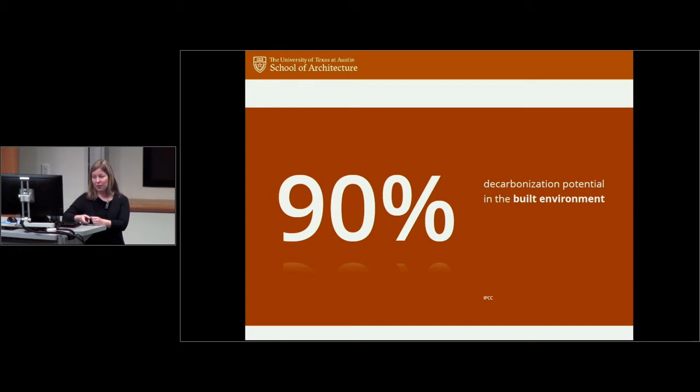The motivation for this research is mainly because 34% of U.S. greenhouse gas emissions are due to the built environment. So we have a lot of impact on the environment, and the IPCC has noted that the decarbonization potential in the built environment could be up to 90%. So this 34%, when you combine it also with the other, let's say 30% is transportation and roughly another 33% is industry. If you look at transportation and buildings combined, that's basically our cities. So how we design and build our cities is over half of the CO2 emissions. And so we have a lot of leverage as designers, urban planners, architects, engineers to address this issue.

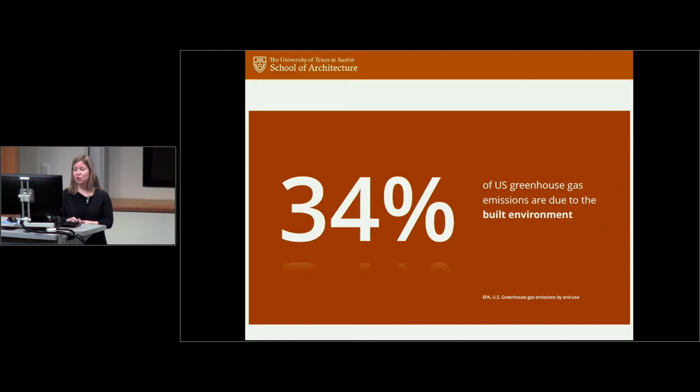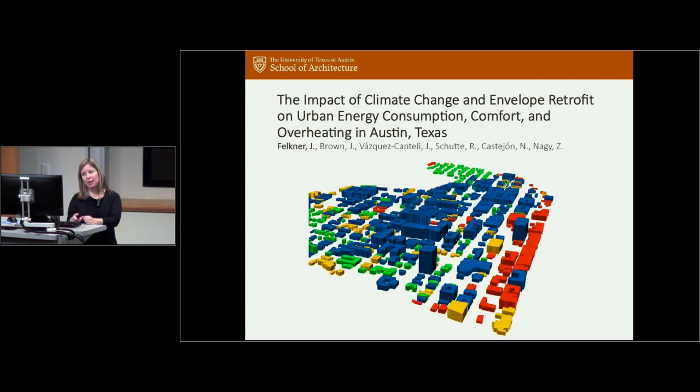So the first project I'd like to talk to you about is the impact of climate change and envelope retrofit on urban energy consumption, comfort, and overheating in Austin. So what we did is first we took a specific neighborhood in Austin. We wanted to look at West Campus because West Campus is already undergoing so much change, so it's a good test case for what could happen in Austin to come. And we wanted to look at 4 different housing types.

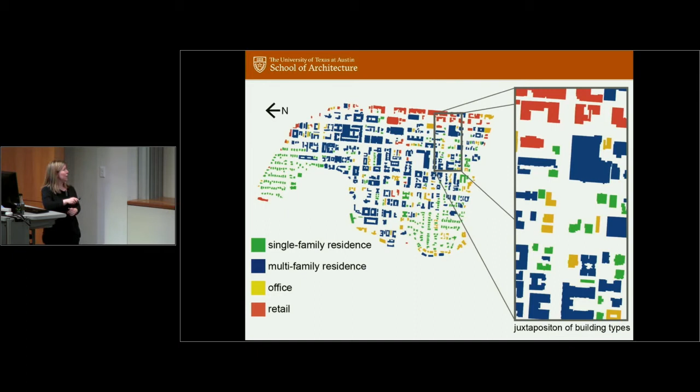In green, you see single family residences. In blue, you can see the multifamily. Yellow is office and red is retail. So this area is already becoming mixed use, where you will see a juxtaposition of different building types from single family homes to retail and larger multifamily homes. And then on the outskirts of this area, you see still very many original single-family homes, and of course offices and retail among the major streets.

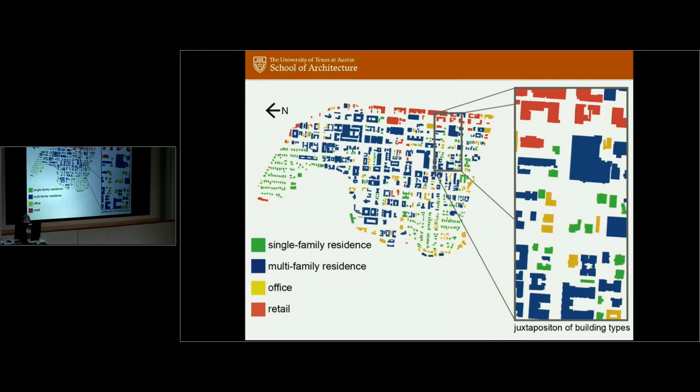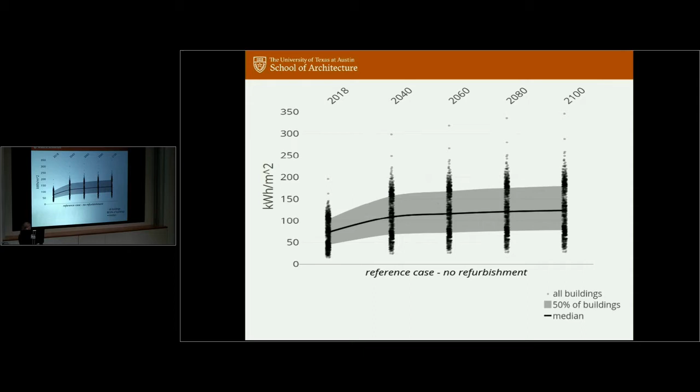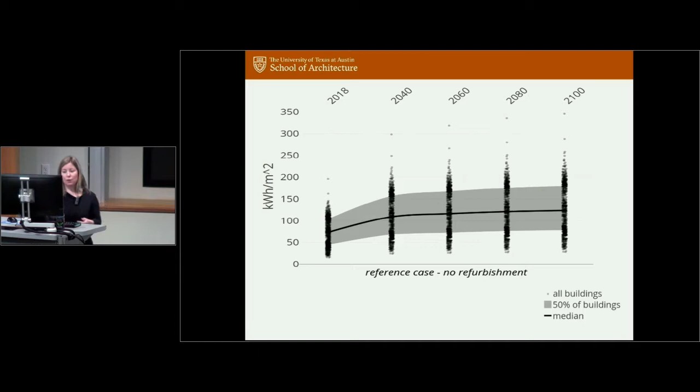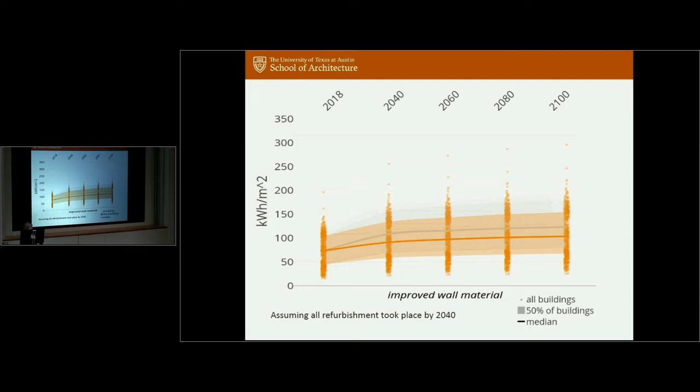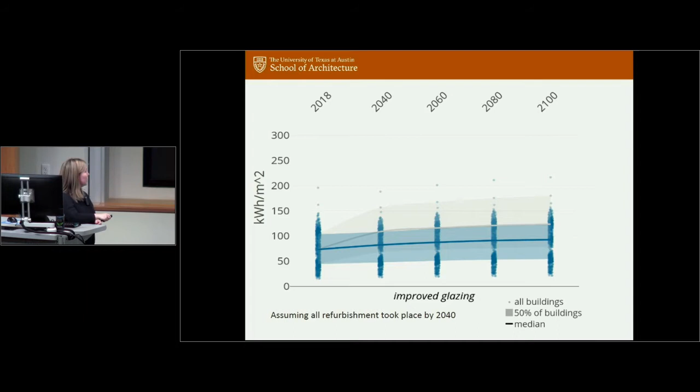If you improve the glazing or the windows of your building, you see even more of a dramatic improvement. So we think this is because we are a cooling dominant climate where we rely upon a lot of air conditioning and we have a lot of sun. So refurbishing those windows is going to improve the performance a great deal for your energy.

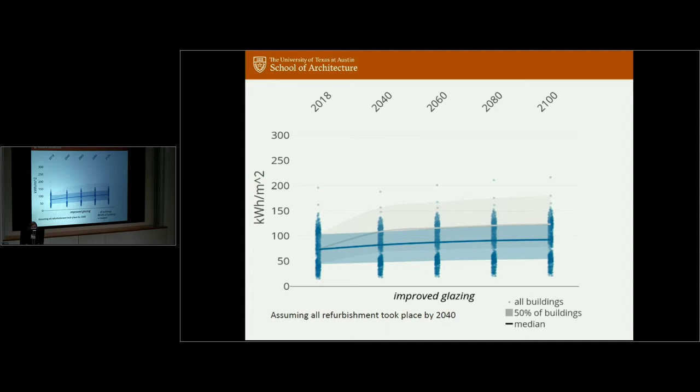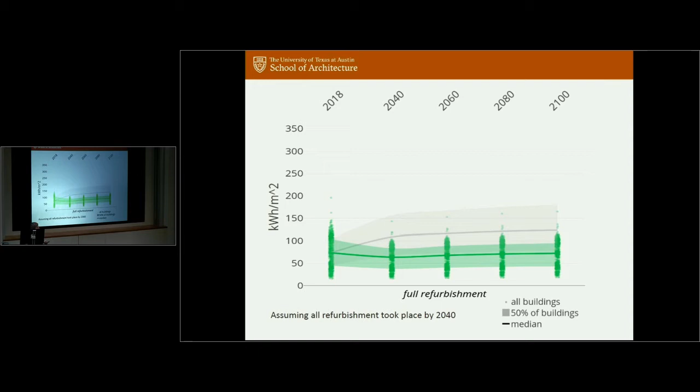And best of all, we found if you changed both the walls and the windows in all of the buildings, you could see the energy consumed by all buildings would be much lower than the median, even what we have today, even in the face of increased temperatures. So we could have a huge impact on our carbon emissions just by refurbishing our buildings, both windows and walls.

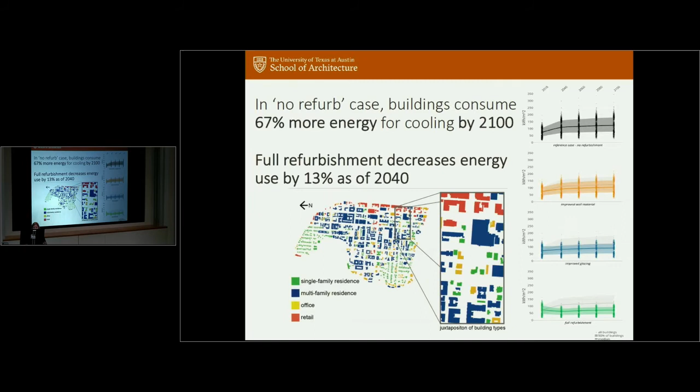You can see now that different building types are going to respond differently to an overheating condition. And that was somewhat surprising to us. We thought that they'd somewhat be affected in a similar way, but you can see the retail is having the worst case. In the no refurbishment case, if we don't refurbish our buildings, they'll start to consume 67% more energy just for cooling by 2100. So that's not something necessarily we would want. We're trying to reduce our carbon footprint, not increase it.

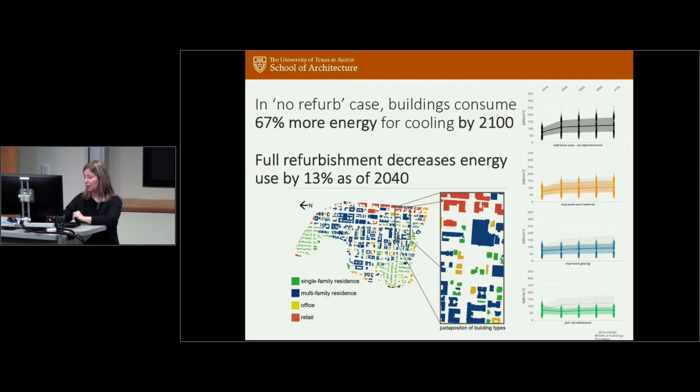Full refurbishment of windows and walls will decrease our energy use by 13% by 2040. So that's a step in the right direction in terms of energy savings. However, it is important to be aware of the risks. Refurbished building envelopes will create more disastrous overheating conditions, even with natural ventilation. So we even looked at what if you have naturally ventilated buildings? Will that help some of this phenomenon? But it didn't. We were still seeing mean indoor temperatures above 41 degrees Celsius by 2100 if you had a blackout. And it's also interesting that different building types will experience this in different ways.

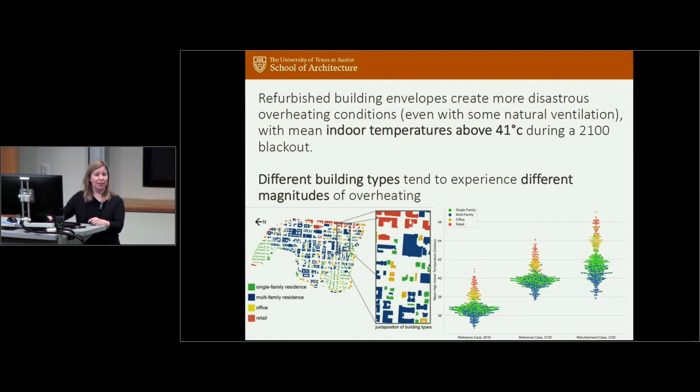So there's a lot more research to be done in this area, and our group is starting to look at this issue along with other groups on campus, mainly for Austin, because that's where we are and that's what we care about. We're using Austin as a test case, which of course can be relevant for the rest of the country as well. So building upon this first study, we were thinking about Austin. We're growing so rapidly. How do we deal with all of the new people coming in and the increased population in general? You can see in the last 100 years, Austin's skyline has changed dramatically. Even in the last 10 years, it's changed quite a bit. Our traffic has gotten a lot worse.

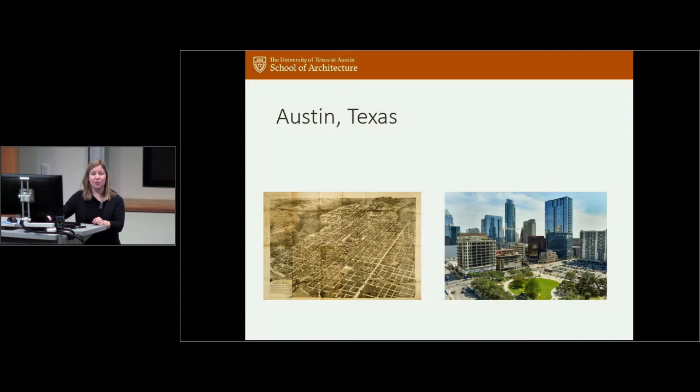So planners are starting to really worry, what are we going to do? And so we started to look at this in terms of also climate change. How will we deal on the larger city scale with this issue? So this project, Urban Densification and Housing Typology for Climate Change Mitigation, is looking at the larger scale effects of how we're going to address climate change and where we should densify and what timeline should we densify.

It's a very tricky subject. There's a lot of not in my backyard, which is totally understandable. On the other hand, we don't want to have more sprawl either and more traffic, or nobody really wants to have a high carbon footprint from driving so far to work each day. But some people just don't have an alternative. They simply cannot afford to live close in.

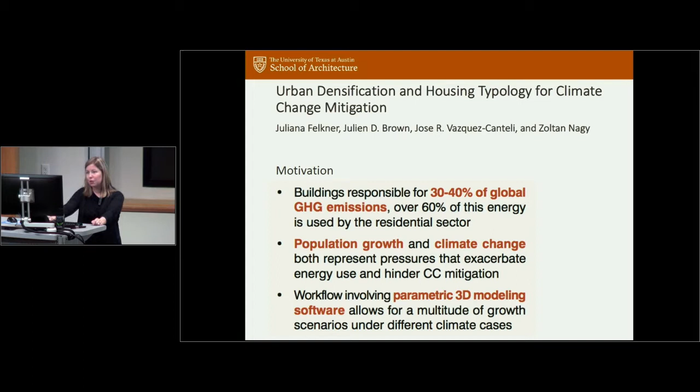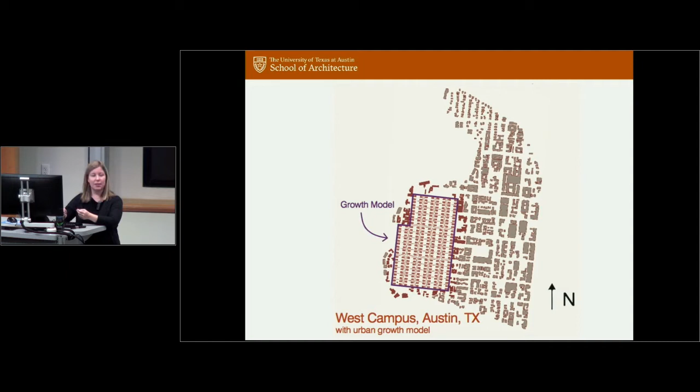So we're looking at different densification scenarios. And again, we took West Campus. We wanted to do a growth model and look at what if each of these plots could be parametrically modeled to see the impact of its growth over time. And so for a single parcel of land, you can imagine right now in many parts of West Campus, what you see is this scenario where you have about 4 single family homes on a single parcel.

And other parts of West Campus, you start to see more of this situation where you've got about 3-story low-rise buildings. Often this is student housing, but not always. There can be other people living in these as well. And slowly you're starting to even see a few of these mid-rise buildings, which are about 8 stories and higher. And here we classify the tower as being anything over 24 stories. And again, we project far into the future, up to the year 2100, to imagine how will Austin look by then.

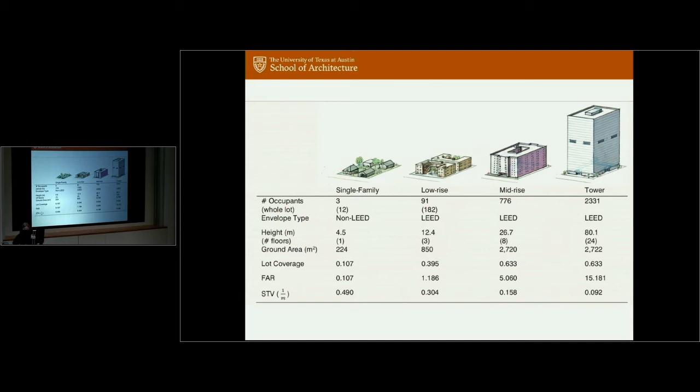And this is how we modeled it. So if you look first at the colors, we represent single family with the gray, the low rise with the orange, mid rise with the pink, and the tower with the purple. And we ran many different scenarios to try to get an idea of what it might be like if Austin grows one way or another. And we thought about the population growth predicted by the city as a whole, and we scaled that down to just think of West Campus if it grows in that same way. So in order for West Campus to continue to contain that much growth within its borders, this is what we found.

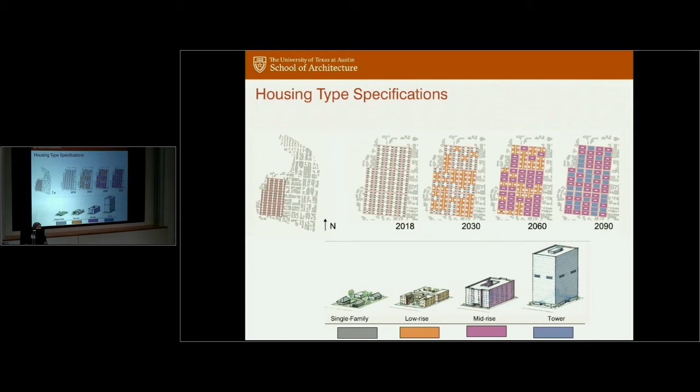In order to occupy that amount of land and deal with the increased density, by 2090, if you mix mid-rise and tower, almost all of those gray single-family homes would be squeezed out. So we're trying to model different ways to see how could we have more green space, how could we not have every single-family home phased out, but also how do we deal with the increasing population.

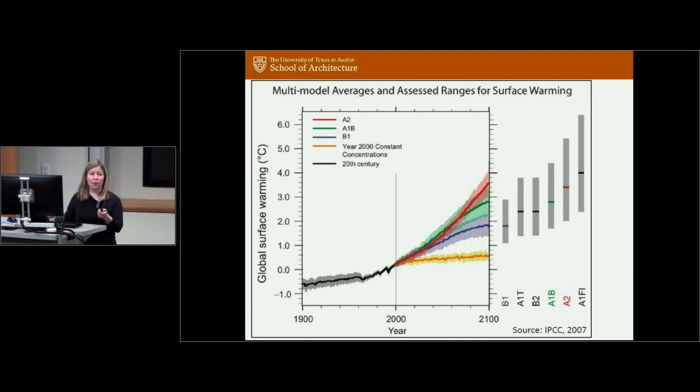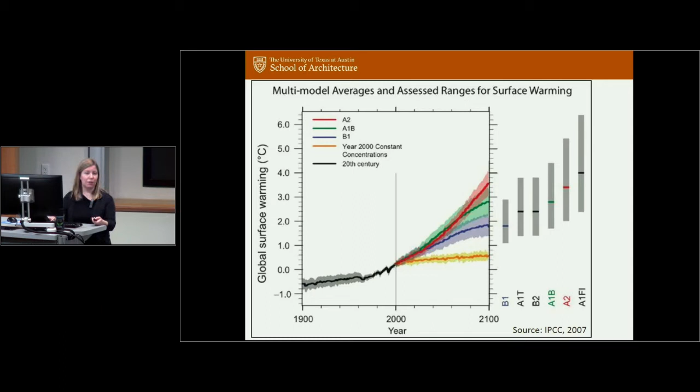We also considered the temperatures. So this is by the IPCC. We used a moderate projection. The estimate we used was the A1B scenario, where they're expecting temperature increases of between 2 and 3 degrees Celsius. This is a moderate one. We might change it out later on to think of the more extreme case, but this is a moderate case that supposes kind of a mix of fuel types by 2100. So not completely phasing out fossil fuels, but having a mix. Of course, we don't know what will happen by then, but that's our assumption.

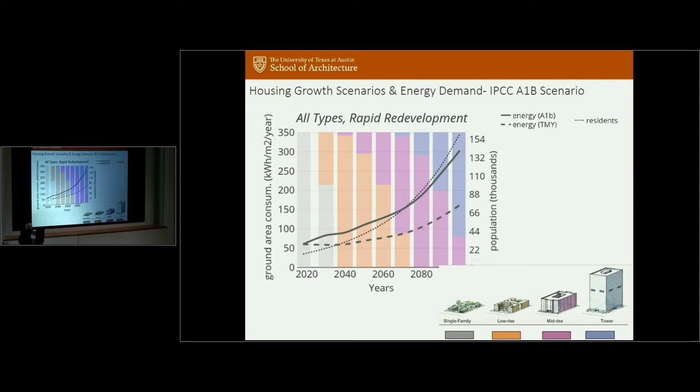So population will increase. What you see here is that the gray represents single-family houses. Imagine we had mostly these. And slowly, with the orange, you start to see more low-rise houses taking up those parcels. If we lock ourselves into low-rise houses on those lots, pretty soon, by 2040, there won't be any more land left. So West Campus could not grow anymore after that point if you decided to only build with this housing type. If you decided to just stay with single family, there's not enough room in West Campus to go beyond 2030 with our current growth.

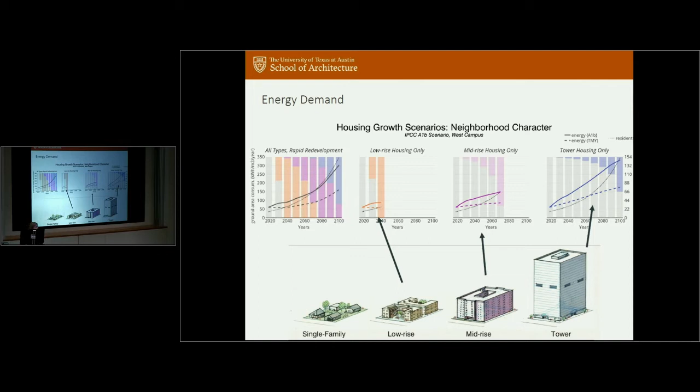If you look at only mid-rise, you see single-family homes can continue to make up a portion of those plots, and even up till 2070, if you have mid-rise mixed with some single family, that would still work. If you only do towers on those lots, one tower is replacing a whole lot, so 4 single-family homes. Yeah, it would be a pity that those 4 homes are lost, but if you think of it in terms of all of the homes that would not be lost, if you do take up one block with the tower, you can see almost half of your parcels could still be single-family homes with green space.

So this will have an impact on how we grow, both on outdoor climate, such as urban heat island effect, ventilation, shading. There are a lot of different impacts that we haven't modeled yet that will be important to consider as we grow. What we did consider is the energy increase based on these increasing temperatures. And you can see all scenarios do see an increase of energy use in time.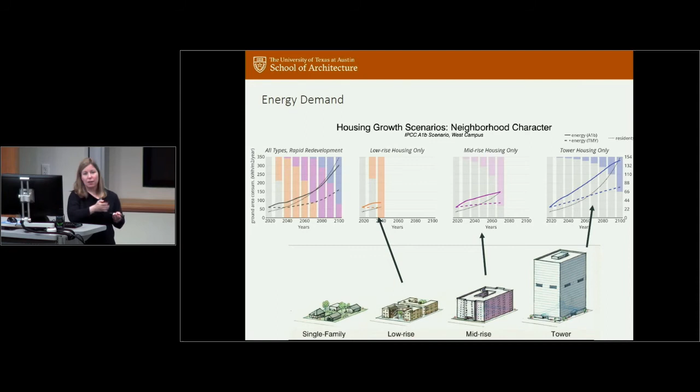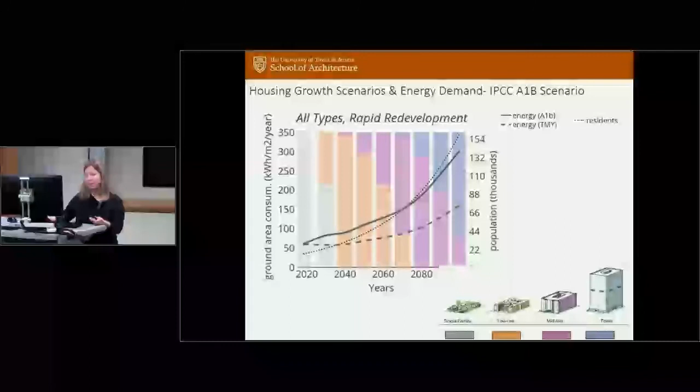However, compared to mixed development where we would allow all types of development, so all types is what we imagine could happen, that slowly they start to mix all types, a little bit of low rise, a little bit of mid rise, a little bit of high rise, something kind of like a mixed checkerboard. That type would not help as much with the energy savings as if you did the 2 what we would consider densest options, which are either mid-rise or tower.

When we modeled the energy use of mid-rise only or tower only, we can see annual energy use difference. You can save quite a bit of energy from tower housing only. Also, some from mid-rise, so this is almost 5% savings. This is about 12% savings by 2040, 2060. It would definitely help because, again, we think they're insulating each other.

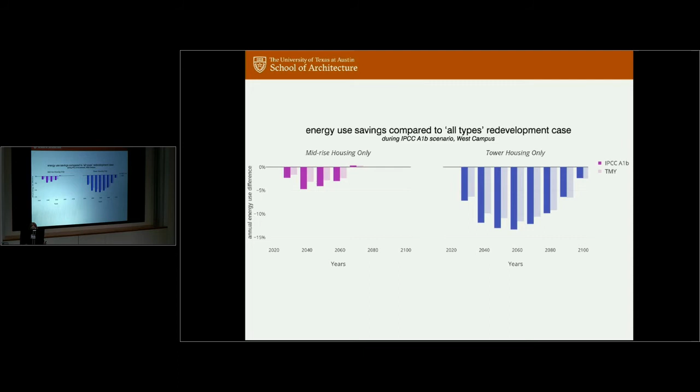So here we see the energy use impact of climate change on different urban densification strategies. You can see by 2040 there won't be a lot of room for these 3-story buildings. They would most likely be torn down and rebuilt, which is also a consideration when you think about the embodied energy that goes into the construction of these buildings. So cooling load will increase regardless of housing type.

So in all cases, multifamily housing would greatly reduce the cooling load per capita compared to single-family housing, which is what we expected. Of course, the adverse effects of climate change, weather, will increase over time as warming intensifies, no matter how we build. But it's important to note that half of the increased energy use will be due to population growth, but the other half is going to be just because of increased temperatures.

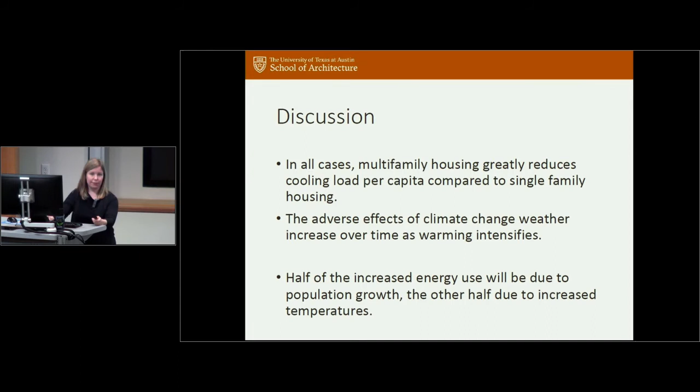So now I'll talk about something a little more optimistic. This is some of my student work. So in class, I teach both construction, which is kind of their applied structures class, and environmental controls, which is where they consider the energy use in their buildings. And I give them a combined project for both classes where they can think about how to absorb the increasing population in Austin without losing our heritage buildings.

So a lot of the students I teach are from Texas, some are from Austin, and I ask them what is their impression of some of the historic buildings downtown, even though they may be only 1 or 2 stories and developers tend to think nothing of tearing them down. And I was really surprised about the connection that some of the people have with these buildings. They get very emotional about them and they know them and they've grown up around them. So it is part of the heritage.

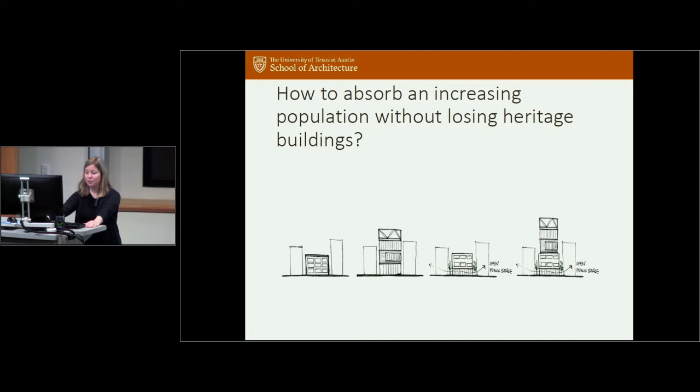And so it's an interesting and kind of a personal goal of theirs as architects to think how to preserve that. So we look at all kinds of examples of vertical extensions for historic structures. Part of this is to give them a lesson in structures, but the bigger lesson is how do they think about densifying historic areas, which Austin has. And you can see many examples from extreme towers added to historic buildings or just subtle additions made to buildings. And I take them through quite a few different precedents throughout the world that they can look at and be inspired by.

And one of the characteristics of adding on to historic buildings is that normally the addition is meant to be contrasting so that there's no kind of false advertising that this was always this way. So the historic preservationists like there typically to be a contrast. If you are going to add something on to it, that it's not confused to be part of the original, because the original should still be legible. So you can see in this single-family house here, this row house, they've added just a single story. That's a moderate addition, but then you can see in other places they've added almost twice the square footage.

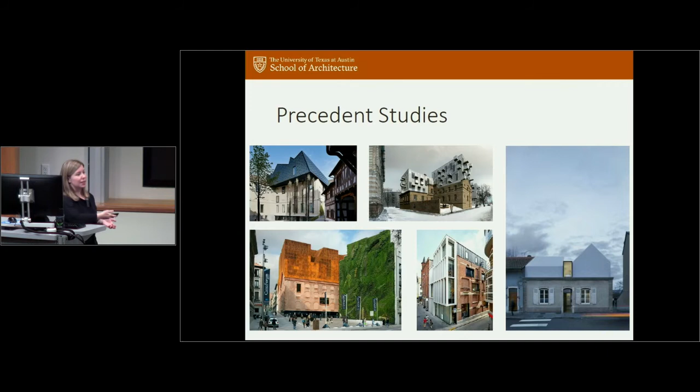Here's another example I like to show the students. These are actual built projects where you can see they've even preserved the state of decay, because that's part of their history, and just built within it without disrupting it.

And another thing that I try to stress with them is to think about this condition walking along the building, looking up at it. So some of these precedents, like this one, this is in New York. This is where you're walking on the street. Let's say you look up at, this was a project by Foster. If you look up at this, you won't even really see the tower, because you'll be so close along the facade, you'll really only see the historic building.

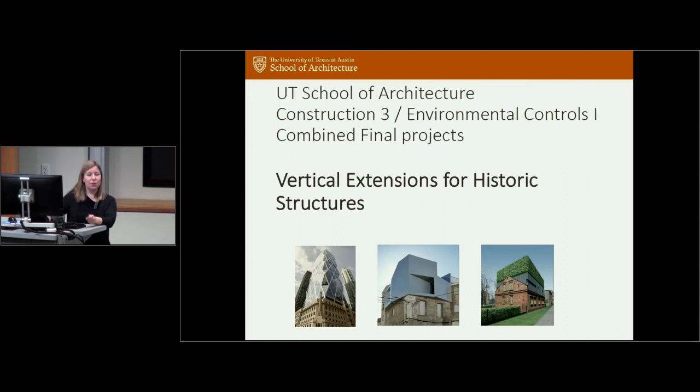It's only if you get far away, like the camera person in this case did, that you'll actually even notice the tower. And so in some places, even Seoul, Korea, I've heard that this is common to do, and they'll simply have a setback so that your eye level won't even see the addition. So sometimes it can be subtle, even though it's adding a lot of square footage.

So this is one building in Austin that some students wanted to add an addition to, and the reason is they liked the history of it. It was designed in 1938, and they liked that it had already been added to. It had 8 stories to begin with, and it had a 9th story added in 1949, and then they added a 10th story in 1952. And now it's listed on the National Register of Historic Places.

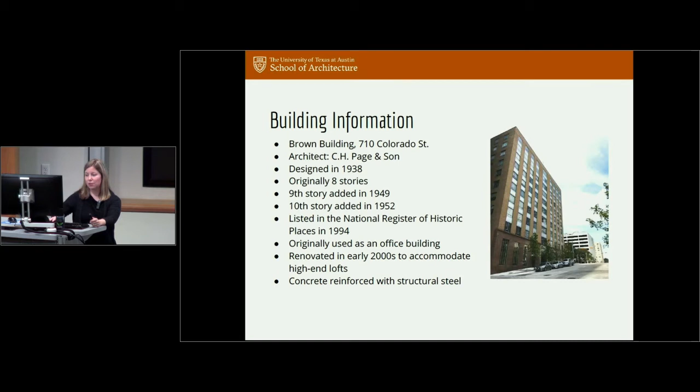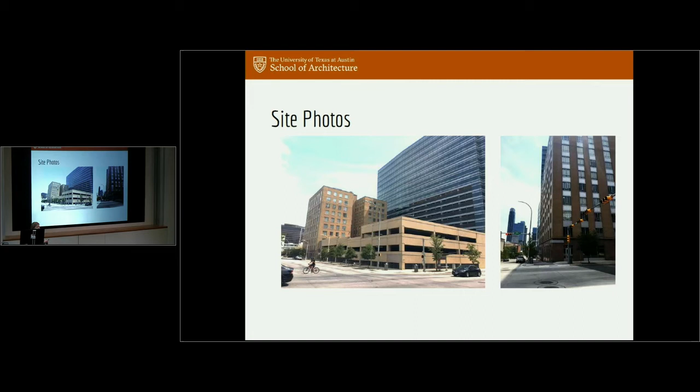And the area they saw a lot of potential for, without disrupting the building itself, was this parking garage behind it. They didn't propose to get rid of parking, even though it's a question, what will we do with parking in the future? Instead, they just wanted to build on top of it and still allow natural lighting to get into these windows on this side. They weren't too worried about blocking a view from this, since it was office, not residential. So their intervention was really sensitive.

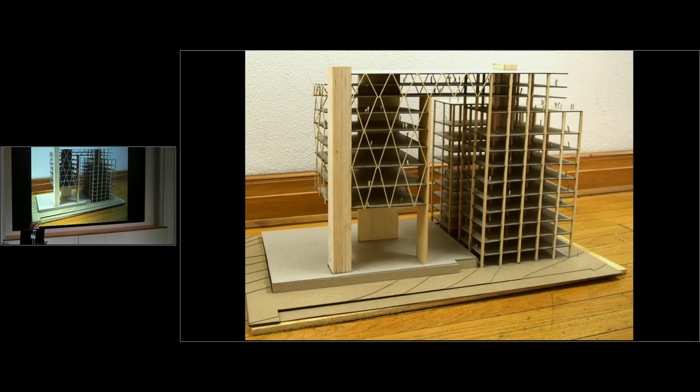They looked at the wind flow, orientation, solar gains, and here's their structural model. So you can see everything. This is the original building. They design over a parking garage, these additional stories, and then they bridge to the original building as well. So they're trying to tread lightly on the site while still adding residential space.

This is another example. You can see here they have an old historic building that they didn't want to really intervene too much with, but yet they wanted to add more than twice, 4 times as much capacity. So they followed their columns along the existing column grid of this structure, but it wouldn't have held it because historic structures are normally not over-designed too much. Maybe you can add 1 or 2 stories, but not a whole lot more.

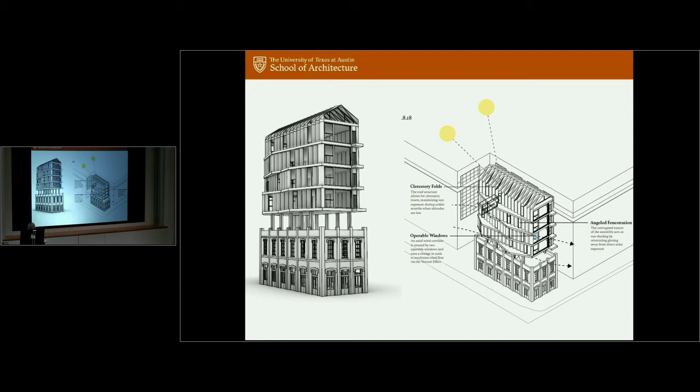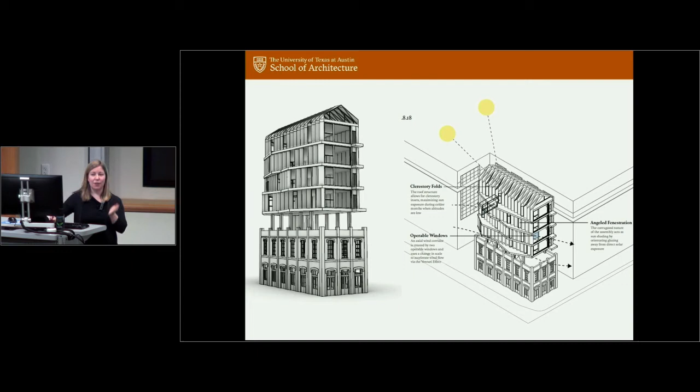So we've taught them different solutions where you can go right alongside the existing columns so that you don't interrupt the floor space or the existing occupancy below. And then you can even wrap those additional columns so that they still look like one. So you can kind of slide by the existing columns within the structure without disturbing it and without trying to calculate would it hold it up or not. And that's what they did here.

I do this even though I would call this project that I do with the students a little bit controversial, especially with the historic preservationists in our school, because it's touchy. Again, it's the not in my backyard mentality. If you love a historic structure, you don't want to see it messed with, but we're trying to think of how can you save them from being torn down? And that's what developers more and more are doing.

And this is one solution, although some of the solutions the students come up with are a little bit radical. We encourage them to kind of stretch their creativity. And I always stress to them, the structure will have a life of 80 to 100 years, sometimes more. The longer you can stretch that out, the better from an energy point of view, because there's a lot of energy that goes into tearing down and building up a new building.

But that means you've got to retrofit it, you've got to take care of it, you've got to allow for flexibility, changes of use over time. So we teach them a lot about adaptive reuse. And we also impress upon them the importance of the HVAC system. That normally just has a lifetime of 15 to 20 years, and the efficiencies of those are critical to how much energy your building will actually use.

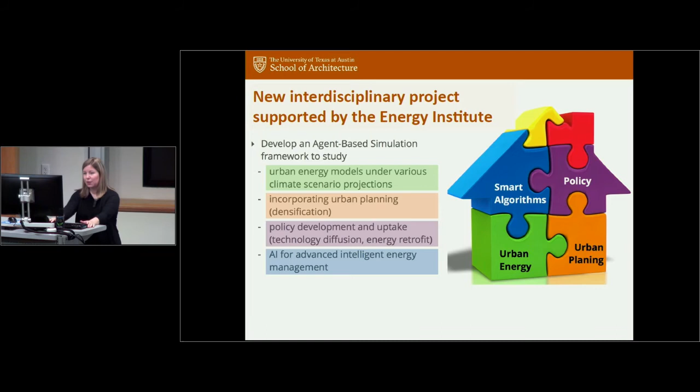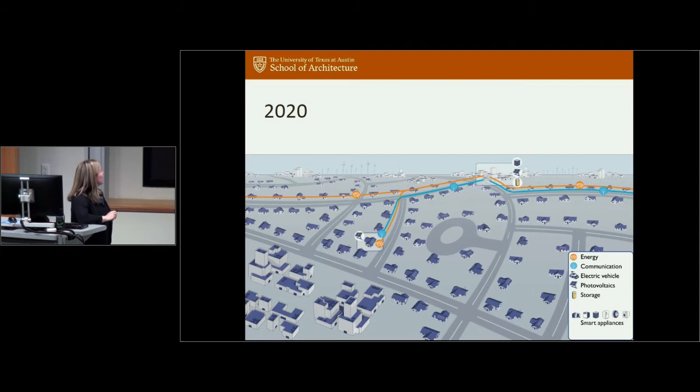And this is from the AI specialist, Dr. Nagy's work, looking at how we could start to model realistically energy in Austin. So here you can see the orange represents the grid distribution, energy communication is in blue. And this is very typical of Austin, many single family homes. What if photovoltaics start to take off? They already are in some neighborhoods. So this is 2020. What about storage? How do we store this energy, looking at the larger scale? And then finally, what is the role of smart appliances for reducing your overall energy use, not just at the building level, but overall at the urban level?

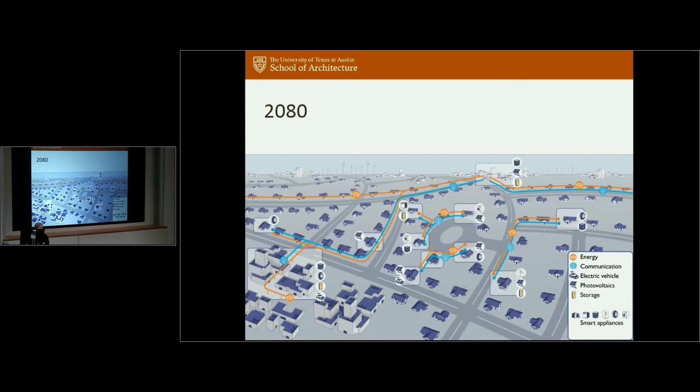Then he modeled into 2040, 2060, 2080. You can see that these buildings start to communicate with each other. They start to store each other's energy. Maybe they even become less vulnerable to power outages. Energy you can see here from a photovoltaic is being stored in a charging station into your electric vehicle. So it's interesting to imagine this future. It will surely be different than that first image I showed you of Austin 100 years ago. No one knows exactly what it'll look like, but we're trying to model to have the best case scenarios for our future. So now I'd like to open it up for questions.

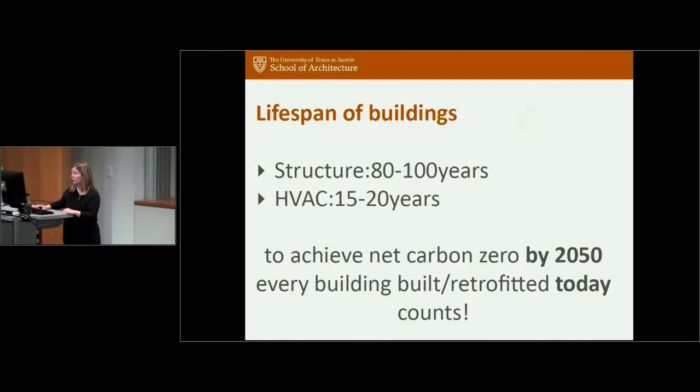Yes. Did I see that right, on one of the slides a while back? You had a slide about the increased air conditioning load, and it wasn't just all the way out to 2080. You had a 2030 that, if I was reading that right, yeah, I think you just went past it. Go forward, yeah, that one. Does that mean you expect we'll have 40% higher cooling load in 10 years? So which bar are you looking at in 2030? Well, 2030, right. And all of them are roughly at 40%. I'm not sure what that is. Can you interpret this slide for me?

What does this mean? So, okay, this is cooling load increase according to the A1B scenario. So this is assuming a moderate 2 to 5 degree Celsius increase, not by 2030, but by 2100. But this is based on this slow increase in temperatures from the IPCC. And yes, it is seeing an increase of 40% for cooling, and for all buildings. And would that entirely be global warming, or is half of that population increase and half climate change?

Right, half of that is population. Okay. Very good. I should have written that on the slide. Half will be population growth, half will be from the increased temperatures. So just to make sure I'm getting it right, if I tell somebody that at least according to this model, if you use A1B, in 10 years we will have to use 20% more energy to cool the same amount of space. Yes, that's what our models are showing.

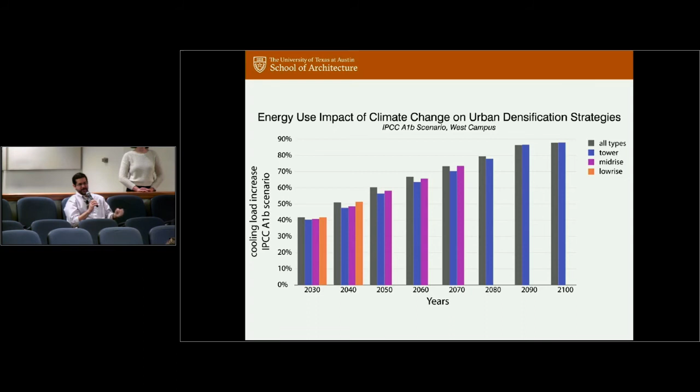Have you talked to anybody at ERCOT? We might want to set up that meeting. I don't think they've seen this. That's pretty stunning, right? Because half of our load on a summer day is air conditioning. Maybe a little less, but about half. So 35, 40 gigawatts. So you're talking about 10 extra gigawatts of load because of climate change.

Yeah. And solar panels and storage, but I don't think this made it into their long-term system assessment. It probably should be. Sorry, thanks. No, that's a very good question. We are trying to get data from Austin Energy, and also we've been advised to talk to ERCOT. It is hard to get their models exactly, but it would be nice to share our own with them and have a talk. That's a good point.

Well, speaking of resources, particularly this is electricity, but I think about the other parts of infrastructure, and I would love to be in some of these meetings with the city, like the water department, for example, wastewater. The pipes that used to serve an area are too small anymore, and that is a huge undertaking to replace all of that. I think densification makes a lot of sense, but my gosh, I just see all these towers going up, and there's hundreds of new living areas. What kind of load is it putting on the water, and of course electricity as well? How is that being dealt with? Are we having conversations at UT with that aspect?

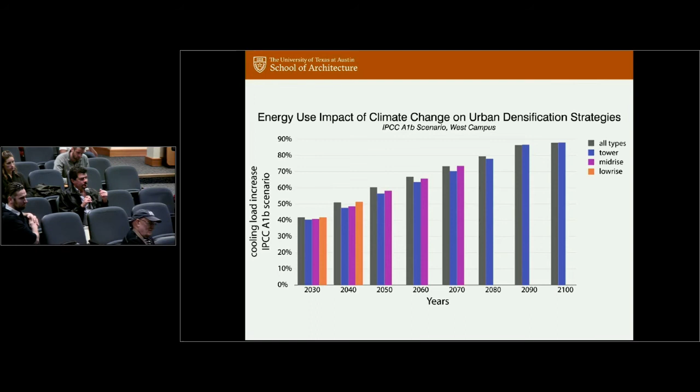Yeah, the infrastructure is a big issue. So that's something where we'd like to look in the future. Of course, anytime you densify, you're going to intensify your water treatment and possibly have to increase your pipe capacity. We compare that to running those pipes all the way out past Pflugerville or farther. And it's far more efficient, actually, to deal with it in a dense way than to also build roads, any kind of infrastructure farther out. It's that distance that's taking up a lot more resources than working within, let's say, downtown limits, and retrofitting your existing infrastructure there.

So we do think that in terms of the embodied energy of the materials themselves and the construction, it would be less to work in a denser way within the city. But of course, you are going to have more people whose water you're going to treat, and you will have to account for that. But we have some initial calculations that it will be far less than if you have that same amount of people in multiple new water treatment plants elsewhere.

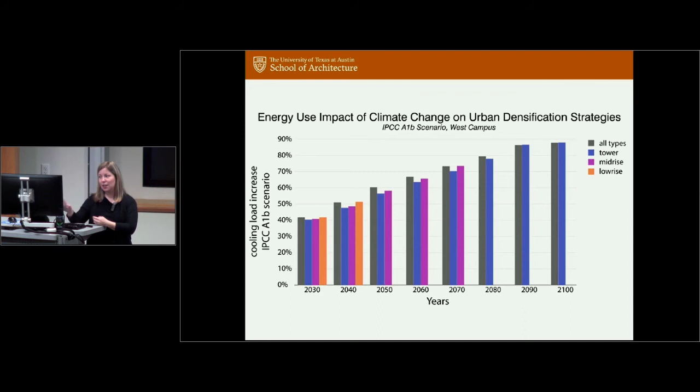So we have someone who's looking a lot at infrastructure. I think Fernanda Leite in the Cockrell School of Engineering is specializing a lot in that, and that is very important to think of. And Adriana, one of our other collaborators on this project from the Energy Institute, we don't have her picture, but we're working on it. She's very good about thinking about all of these different infrastructure scenarios anytime you build a new area. Even though she's a policy expert, they've already got data on some of these issues. So that's a very good question.

Yes? Let me ask a quick question. I'm wondering if there are any kind of miracle technologies or materials on the horizon that developers or builders are holding off on in terms of cost. Like, is there any kind of waiting game of not moving on this yet because people expect some new solution to come out? Or is it really just a matter of design at this point? Does that question make sense? It does. It makes perfect sense.

I've been waiting for innovations in air conditioning. I know Dr. Nagy works a lot with air conditioning and HVAC systems, and we have a student in our sustainable design program who's an engineer, but he's in the architecture department trying to look at new ways of developing dehumidification techniques for air conditioning. If someone could solve that, we could save so much energy with air conditioning. It seems we can send a man to the moon, so we should be able to innovate with air conditioning. That's one area where we would have a huge impact. I don't know where that's going at the moment, though. Hopefully soon.

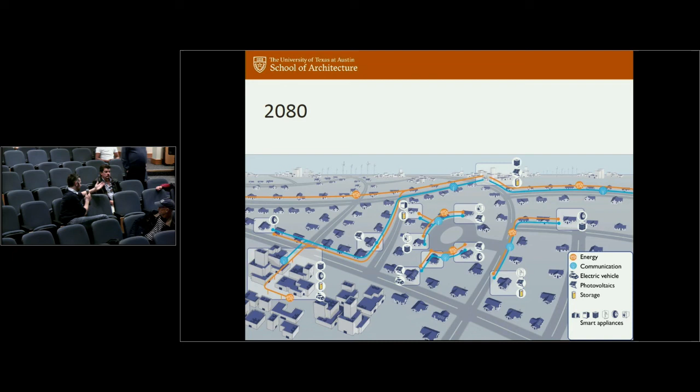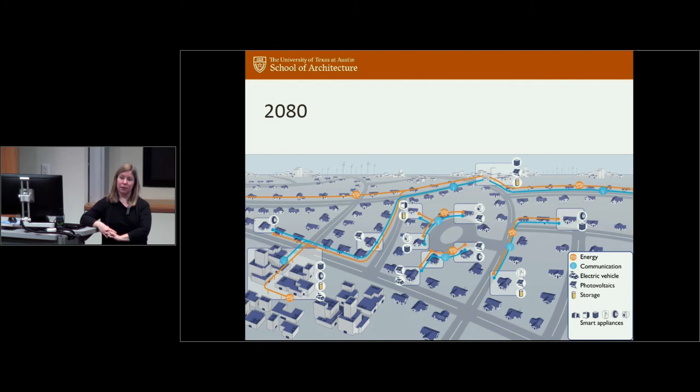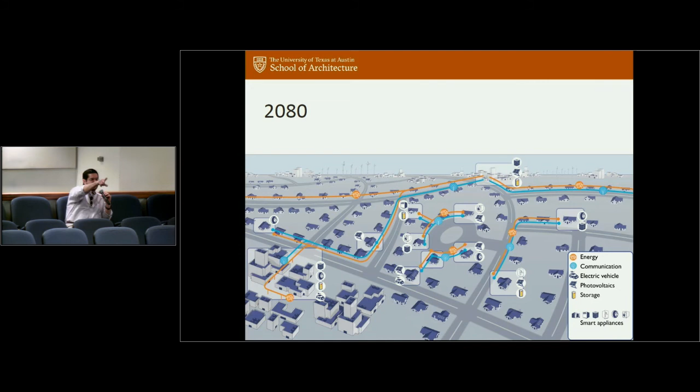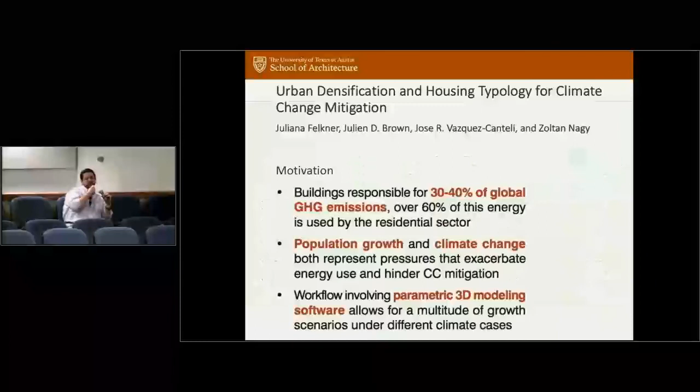If I'm reading that right, you're saying when you refurbish a home, it's going to get hotter inside in these heat waves, and that's just because the envelope is tighter, correct? But you would also be able to hold a set point longer if you pre-cooled. So the specific question would be, did you model anything like that? How long could a refurbished home hold that set point through a blackout for 6 or 8 hours instead of only 20 minutes if it's unrefurbished and air is leaking outside? Is that anything you've looked at or would look at?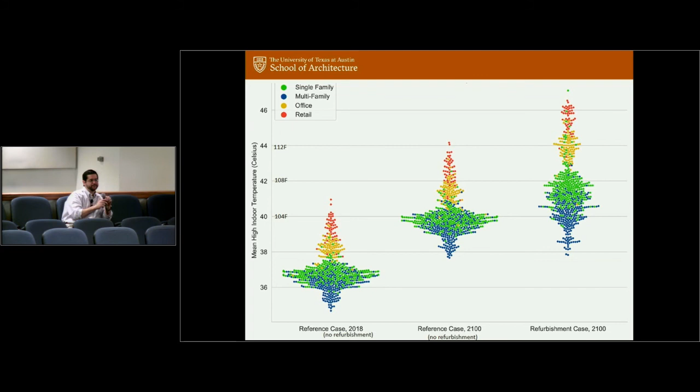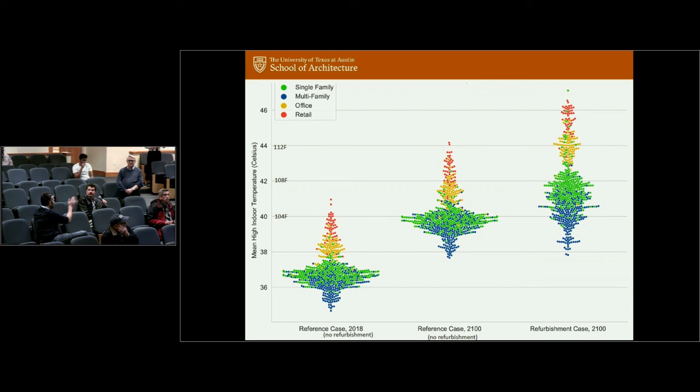Yeah, that's a critical point I didn't mention. These are looking at a blackout that lasted more than one day. If you had a short-term blackout, it wouldn't be this case. That's true, it would hold the cool air longer. That's a very good point. That's what confused me. With a thermally better envelope and better windows, you're going to have a great deal of lag in heat transfer. So that model is over several days of no power, okay, that makes sense. Which we're hoping is not so likely. Right, it's all the more reason to think of renewables, so we wouldn't have that. Yeah?

About the green environment for this. In single family housing, are you looking at what if the house is on a wooded lot? Trees make a significant difference. So are you incorporating green space, particularly trees, into the study and how they would affect it? How do you differentiate between no green and green?

That's a good point, and it is important to consider. We have a PhD student in our Texas Metro Observatory who's starting to map out tree cover, because that also affects shading and humidity. So he's starting to map out where the trees are. That's the first step, knowing where in the city you've got a lot of tree cover.

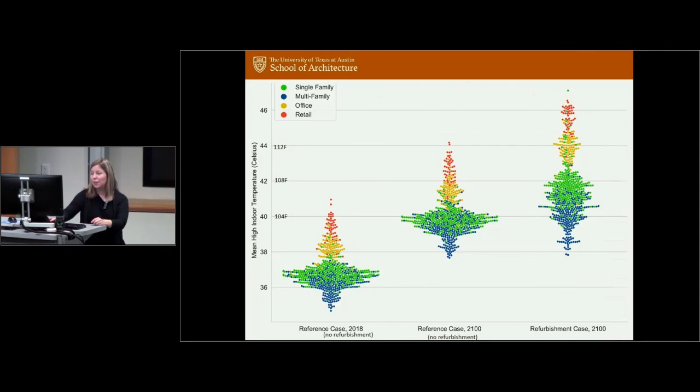And that is a next level that we'd like to incorporate into the models in order to better understand what's happening in single family, because they're not all going to be as in the drawing, right, where we've shown everything as just having one or two trees. Some have, like in Hyde Park, it's almost like a jungle in places where those houses are very well shaded, and it's also the question, how many trees are you willing to sacrifice? Where do you try to be more sensitive?

That's a good point. Once we get the data citywide for where the trees are, he's even looking down to what species of tree. That's one of his research interests. The overheating question, I always took it for granted that tree coverage is good because it shades your house. And I was at a conference recently where two professors started arguing about tree coverage.

One was saying, yes, they shade you, and then another was saying, yes, but in a time of a blackout, they're trapping some of the heat and humidity. And so there's debate, and we don't have the models currently, but we want to simulate the conditions that are best for energy conservation through shading, but also allowing, in the case of a blackout, wind to pass through. Mainly it's about ventilation. But that's a good point.

Okay, one other thing concerning the green space, has anybody done any psychological or emotional studies on how these environments affect people where you're cutting out? Like the West Campus that you were showing, there was no green space anywhere. What kind of impact is that going to have on people?

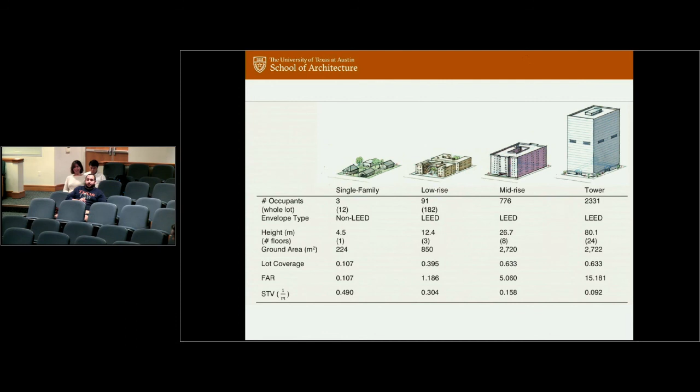Perfect. And a quick question on the photovoltaics. Who would implement it and who would own it? Because of course there's a big NIMBY movement. Would the utility companies be the ones implementing and managing it, of course? Or would you have to incentivize owners to do that?

So that's something I think our other colleague Adriana is looking at in the policy department. How do you incentivize it? How do you make it economically realistic for people? I don't think she has the answers yet herself, but that is part of what we're going to look into. Those are very important questions. It's exactly what this project will hopefully answer. Thank you.

Hi, you brought this up in your last answer, but have you thought about incorporating humidity levels into your model? Because that's also a parameter which affects human comfort a lot. And also the density of humans present in the building significantly affects the humidity. So have you thought about bringing it up in your model?

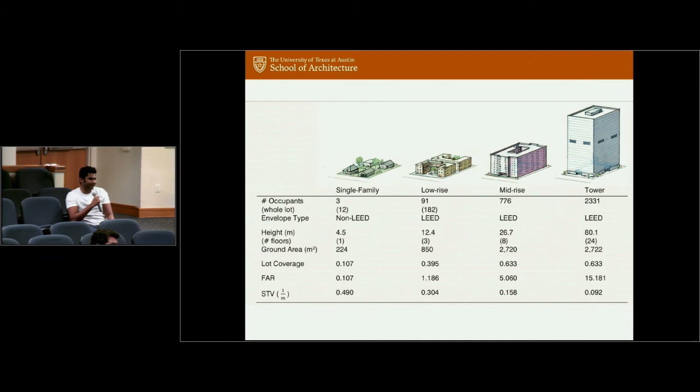Yeah, our energy modeling deals with dry bulb temperatures. We should add more consideration to the perception of the temperature based on humidity. And right now, even our building codes are designed for northern climates where you want to keep heat in, or else dry climates where you don't have the humidity issue. And even our rules of thumb for passive design come out of places that don't have this issue of humidity.

So I'm hoping that more and more students here at UT, especially the student we have coming from Florida who's dealt with humidity all his life, will hopefully find a way to start considering humidity. But when it's not even in our building code sufficiently, it's hard to find it in the modeling software. But that's a good point.

Finish up with one more question. Yeah. My other concern is water. Where's all the water going to come from to take care of all of these people? What brought this up mainly, you mentioned farmland. Right now, I've just read that Austin's looking at taking water from east of town, which is water that farmers use. And so there's this huge discrepancy there about who's more important for getting the water. And with climate change, we have a possibility of extreme drought times. So how are we going to solve all these water problems?

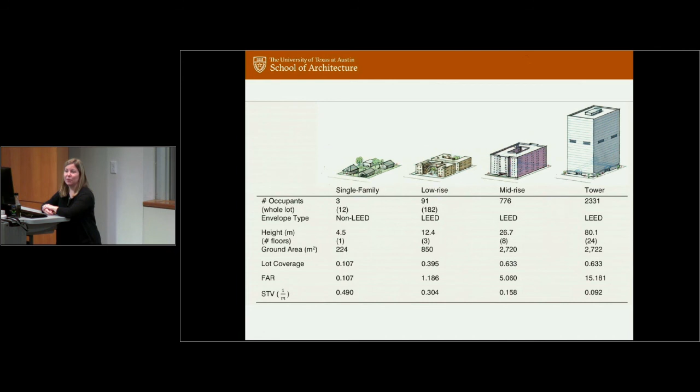Someone who's really good with water is Katherine Lieberknecht in community and regional planning. She's looking at all the different waterways, and she's on the Planet Texas 2050 project with me, trying to map out water resources throughout the state of Texas. So she'd probably have a better answer than I do, but all I can say is drought is coming, and I don't know how to deal with it.